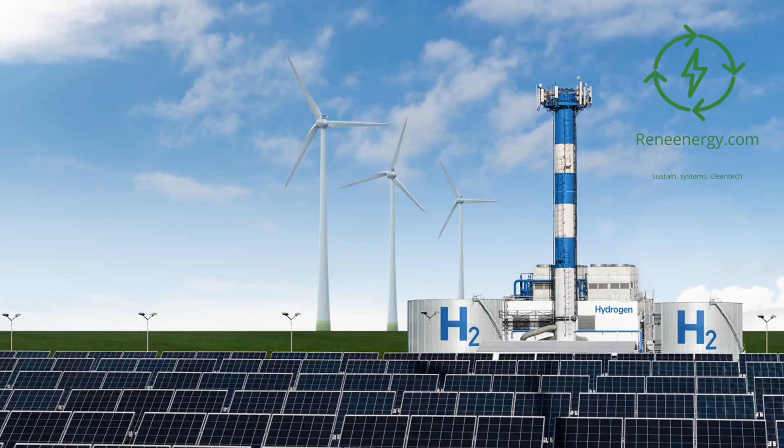One of the most promising and innovative solutions in this journey is green hydrogen. Heralded as the fuel of the future, green hydrogen is not just a clean energy source, it's a beacon of hope for a carbon-neutral future. In today's episode, we delve deep into the world of green hydrogen, specifically focusing on its feasibility across various critical industries. We'll explore how industries like cement, chemical, steel, and power can transition to green hydrogen, the challenges they face, and the potential impact of this shift. Join us as we unravel the complexities and uncover the possibilities of green hydrogen, paving the way for a sustainable and greener tomorrow.

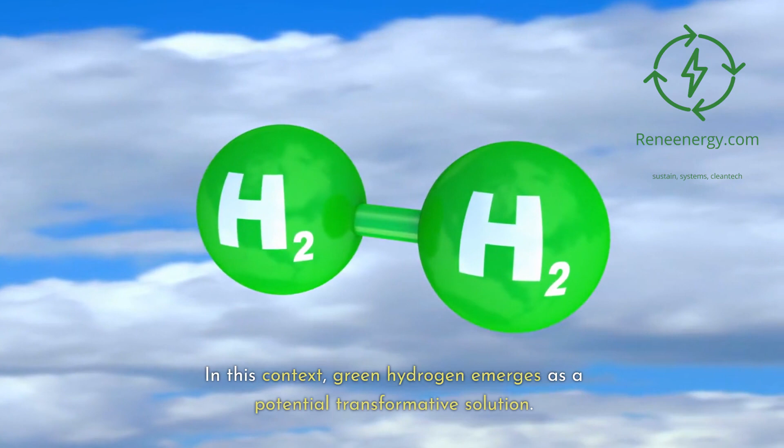Section 1. Green hydrogen in the cement industry. Overview of the cement industry's environmental impact and the potential role of green hydrogen. The cement industry, essential for infrastructure development, is a major contributor to global carbon emissions. This industry is responsible for over 4 billion tons of CO2 annually, making up 8% of global emissions. The process of producing cement, primarily through the firing of limestone and clay, is energy intensive and releases significant amounts of CO2. In this context, green hydrogen emerges as a potential transformative solution.

Technological advancements and green hydrogen integration. The integration of green hydrogen in cement production is a part of the broader energy transition in the sector. Technological advancements complement the role of green hydrogen. This integration is particularly promising as green hydrogen, being a sustainable way to store and move energy, aligns with the industry's push towards decarbonization.

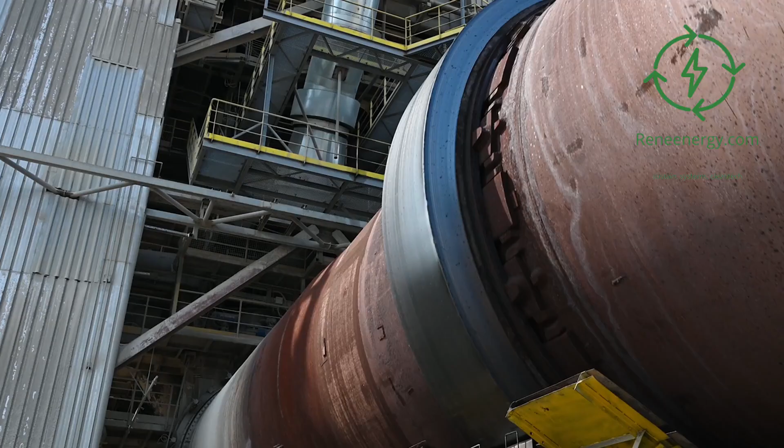Firing cement kilns with green hydrogen. The adoption of green hydrogen in cement kilns is advancing, with trials in Europe aiming for 100% fossil fuel substitution. Combining green hydrogen with natural gas is seen as an effective method to decarbonize electricity and heat production in the cement industry.

Managing hydrogen in cement plants. Handling hydrogen in cement plants requires precautions due to its flammability and buoyancy. The integration of hydrogen in cement kilns can impact the refractory materials and potentially increase NOx levels, necessitating careful management of hydrogen injection and oxygen concentration.

Co-locating electrolyzers and utilizing byproduct oxygen. An additional benefit of integrating electrolyzers in cement plants is the availability of byproduct oxygen. This oxygen can enhance the cement production process by providing a shorter and more stable flame, enabling higher quality clinker production.

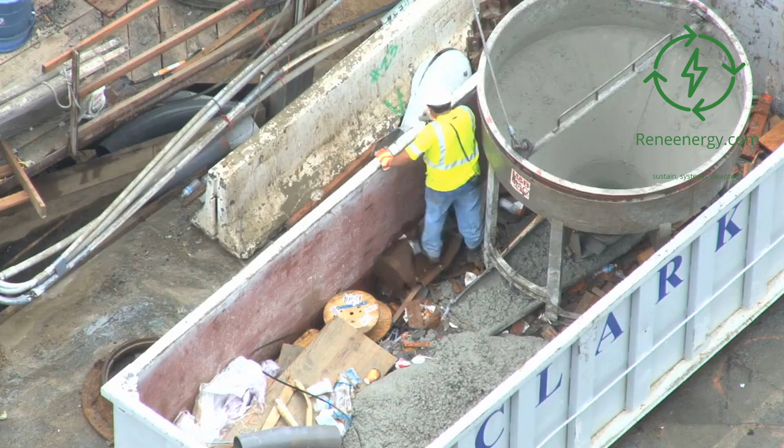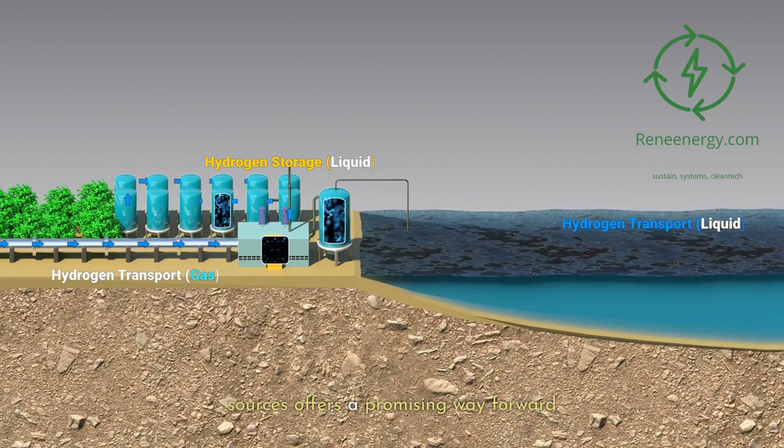The path to decarbonization. While the cement industry has made progress in reducing its environmental impact, the path to full decarbonization remains challenging. However, the use of mature technologies and green hydrogen generated from renewable sources offers a promising way forward. In summary, the adoption of green hydrogen in the cement industry presents a crucial opportunity to reduce its substantial carbon footprint. Despite the challenges of high costs and the need for new infrastructure and technologies, the potential benefits of reduced CO2 emissions, enhanced energy efficiency, and sustainable production processes make it a compelling path for the industry's future.

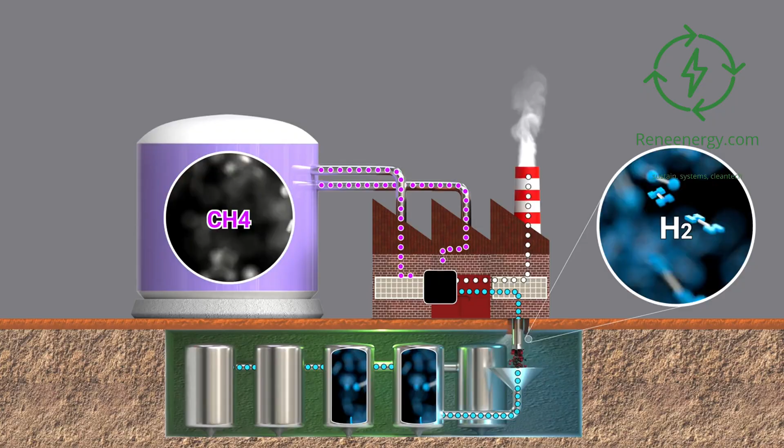Section 2. Green hydrogen in the chemical industry. Role of green hydrogen in the chemical industry's shift to sustainability. The chemical industry plays a crucial role in the global economy and is pivotal in the transition to a sustainable and circular economy. However, this sector faces significant challenges in achieving net zero emissions.

Green hydrogen emerges as a critical enabler and an opportunity for the industry, not only aiding in achieving net zero but also opening up new sustainable revenue streams. To fully realize the potential of green hydrogen, the chemical industry needs to go beyond energy efficiency and bio-based feedstock, exploring innovative solutions like green hydrogen, carbon capture, and electrification.

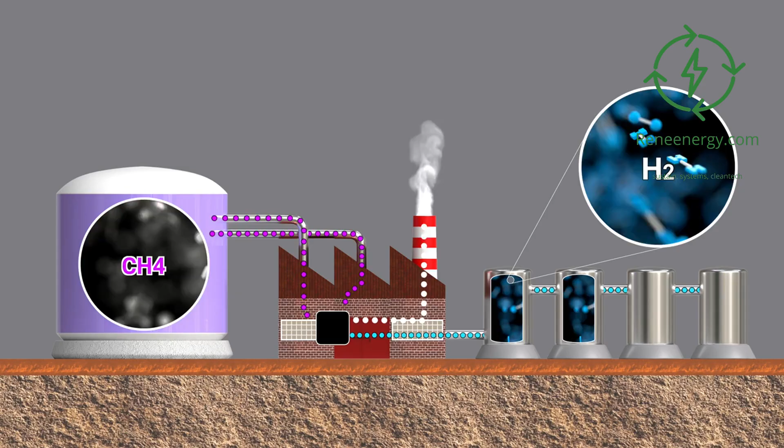Current use and future potential of green hydrogen in the chemical industry. Currently, the EU industry uses about 10 million tons of hydrogen, mainly for producing ammonia and in refining. Most of this hydrogen is gray, produced in a carbon-intensive manner. The shift towards low CO2 hydrogen, specifically blue and green varieties, is crucial for decarbonization.

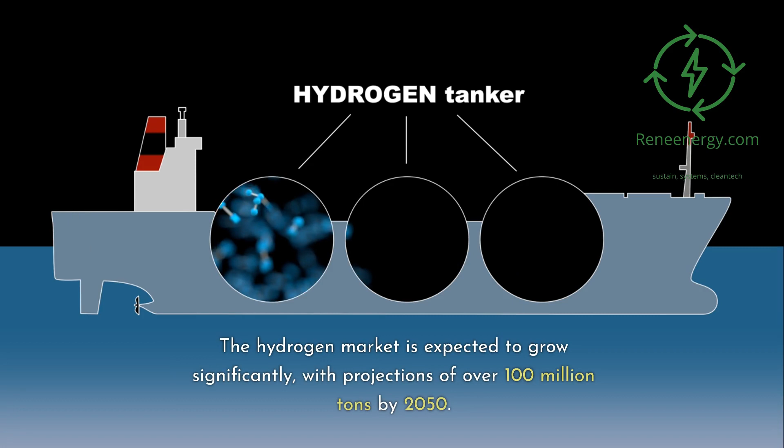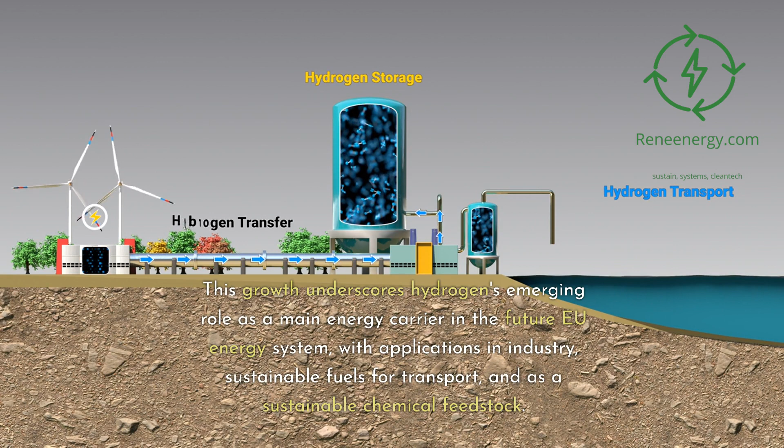The hydrogen market is expected to grow significantly, with projections of over 100 million tons by 2050. This growth underscores hydrogen's emerging role as a main energy carrier in the future EU energy system, with applications in industry, sustainable fuels for transport, and as a sustainable chemical feedstock.

Investment and global initiatives in hydrogen development. The emerging hydrogen economy is garnering support from policymakers at both European and international levels. An estimated investment of €430 billion is required by 2030, highlighting the industry's commitment to and interest in hydrogen. This investment is crucial for developing hydrogen projects and addressing the urgency to act now.

Countries outside Europe, like China, are also formulating hydrogen strategies, with the demand for hydrogen in China expected to reach 60 million tons annually by 2050.

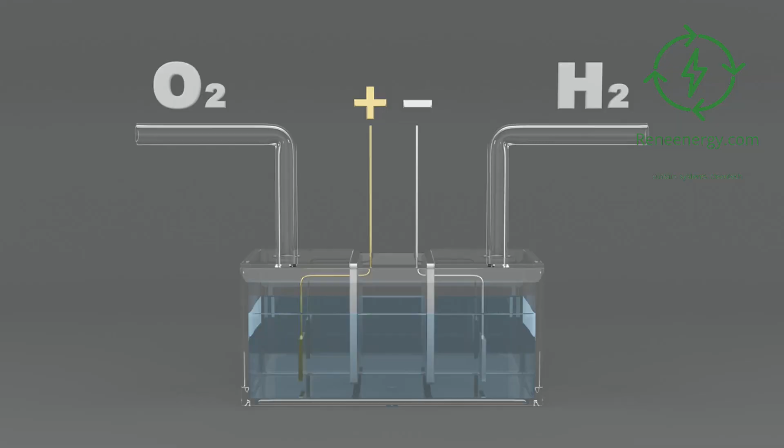Challenges in scaling up green hydrogen. The scaling up of green hydrogen faces several significant challenges. First, technology readiness and cost. Improvements in electrolysis and fuel cell efficiencies are necessary for cost-effective hydrogen production. The cost of green hydrogen production needs to be competitive with conventional fuels.

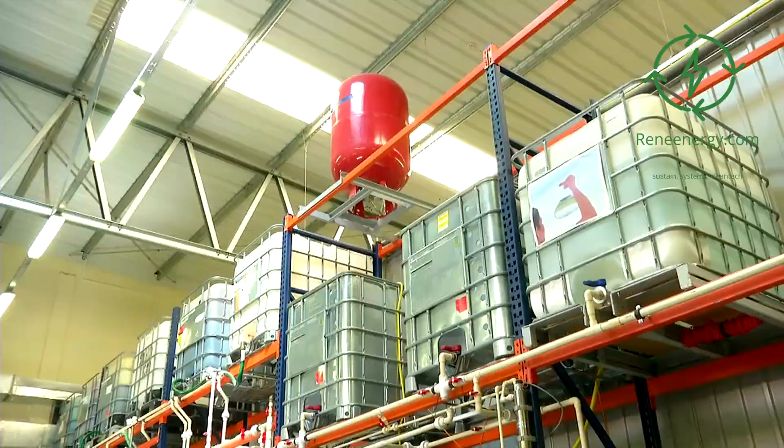Second, infrastructure development. Large-scale hydrogen production facilities and robust distribution networks are essential. Investments in production capacity and storage solutions are critical.

Third, market off-takers and customer acceptance. Creating demand and convincing market off-takers of hydrogen's benefits is vital for market development.

Fourth, financing and investment. Overcoming the capital-intensive nature of hydrogen scaling requires attracting investments and developing innovative financing models.

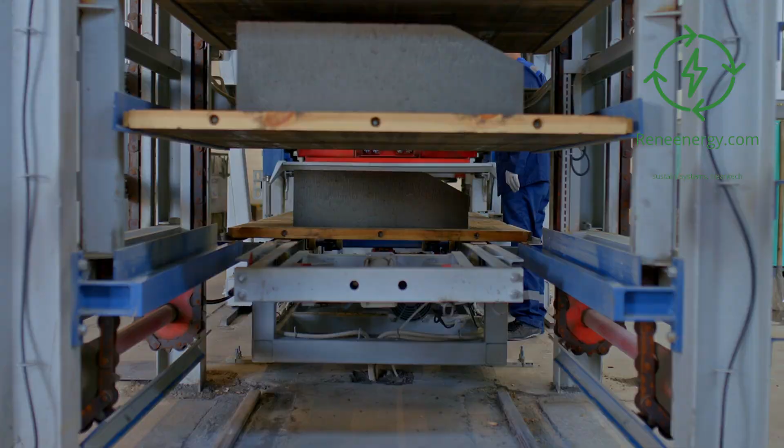Fifth, supply chain bottlenecks. Addressing the availability and sourcing of raw materials and ensuring an adequate supply of critical equipment is necessary. Sixth, policy frameworks. Supportive policies and regulations, financial incentives, and international collaboration are key to fostering green hydrogen adoption.

The chemical industry's transition to a more sustainable portfolio through green hydrogen is a complex but feasible endeavor. It requires strategic choices, technological advancements, substantial investments, and supportive policies. Addressing these challenges collaboratively can help the chemical industry make a profitable and sustainable shift to green hydrogen, ultimately contributing to global decarbonization efforts. Section 3: Green hydrogen in the steel industry.

The steel industry's carbon footprint and the role of green hydrogen. Steel, a cornerstone of modern construction and engineering, faces immense pressure to reduce its carbon footprint. As one of the largest CO2 emitters globally, the steel industry's transition to lower emissions is both an environmental necessity and an economic imperative. Every ton of steel produced results in approximately 1.85 tons of carbon dioxide, contributing to about 8% of global CO2 emissions.

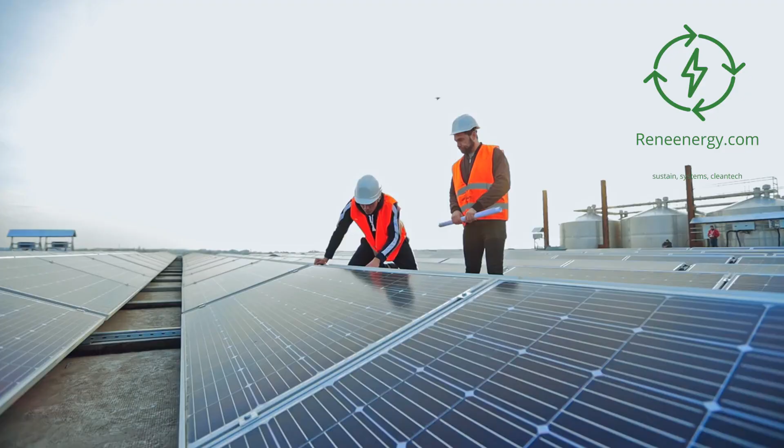In this context, hydrogen-based steel production, particularly using green hydrogen, emerges as a critical strategy for decarbonization. Implementing hydrogen-based steel production can be approached in both new, greenfield, and existing, brownfield, facilities. This involves retrofitting existing electric arc furnace (EAF) plants or rebuilding facilities to incorporate green hydrogen in the production process. Decarbonization strategies will vary depending on location, technical feasibility, infrastructure, market demands, and the regulatory environment.

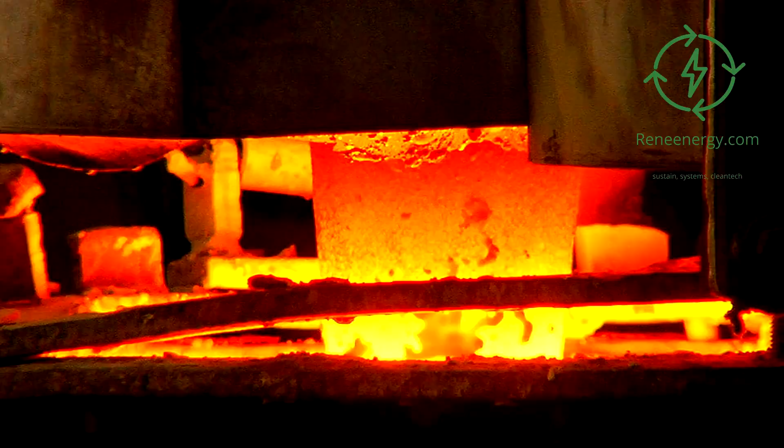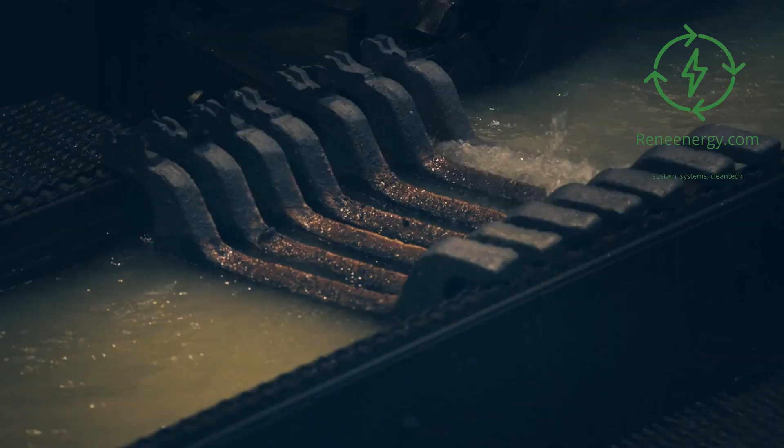Direct reduced iron (DRI) and electric arc furnace (EAF) using hydrogen. A key method in this transition is using green hydrogen-based direct reduced iron combined with EAFs. This process replaces fossil fuels with hydrogen produced from renewable energy, leading to nearly emission-free steel production. The hydrogen can be used as an alternative reductant to produce DRI, which is then processed into steel using an EAF. This DRI/EAF route, currently employed using natural gas, can be adapted to use green hydrogen, significantly reducing carbon emissions.

Challenges and cost dynamics. The transition to green hydrogen-based steel production involves several challenges. First, green hydrogen production. Producing green hydrogen requires significant electricity from renewable sources, posing a challenge in ensuring sufficient and steady supply. Second, cost of green hydrogen.

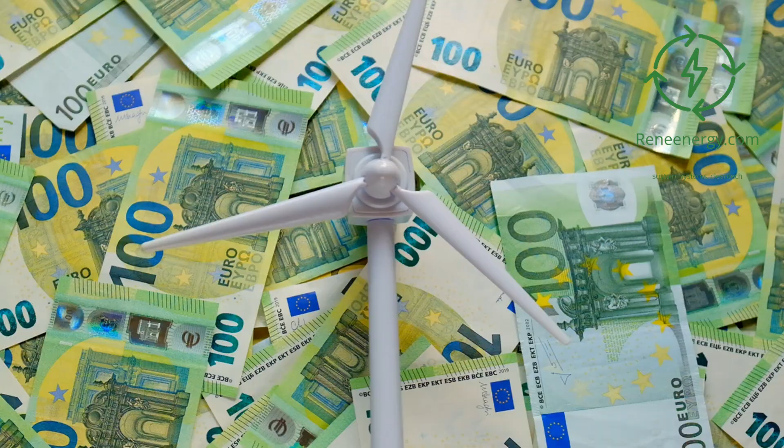While currently higher than gray hydrogen, the cost of green hydrogen is expected to decrease, driven by falling costs of renewable electricity and electrolyzers. Third, the EU Emissions Trading System (EU ETS). The EU's cap and trade strategy for CO2 emissions is influencing the economic dynamics, making green hydrogen-based steel production more viable as carbon dioxide prices increase.

By 2030, the cost dynamics are expected to shift, making green hydrogen-based steel production more economically competitive. This shift will be crucial for the industry, especially in Europe, where stringent emission regulations are in place.

Decarbonization tipping points. The timeline for the industry's transformation to green hydrogen-based steel production is influenced by various factors. First, power supply. The need for increased capacity and electricity derived from renewables is crucial for this technological shift. Second, hydrogen supply security.

Ensuring the availability of green hydrogen on an industrial scale is fundamental to the production of hydrogen-based steel. The steel industry's journey towards green hydrogen-based production is not just a response to environmental challenges but also an opportunity to reshape its future. While the path involves overcoming significant technical, economic, and regulatory challenges, it holds the promise of transforming one of the world's most carbon-intensive industries into a more sustainable and environmentally responsible sector.

Section 4: Green hydrogen in the power industry. Transformative potential of green hydrogen in power generation. Green hydrogen is increasingly recognized as a game changer in the power industry. It offers a cleaner burning alternative to conventional fuels and is pivotal in the transition to clean energy. The power industry can significantly benefit from the versatility of hydrogen, especially in terms of reducing carbon emissions and advancing towards a sustainable energy future.

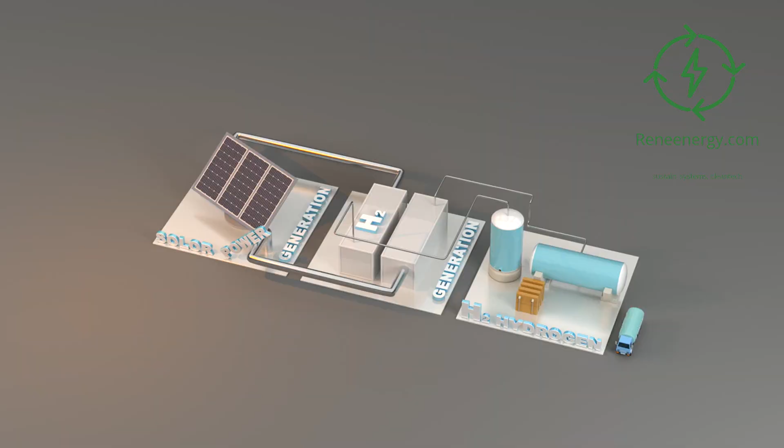Advancements and feasibility studies in green hydrogen production. Although the current cost of producing green hydrogen from renewable sources is high, the momentum along the value chain is driving cost reductions in its production, transmission, distribution, and end applications. Sectors like oil refining, ammonia, methanol, and steel production are already extensively using hydrogen. In power generation, hydrogen has the potential to play a critical role, particularly in sectors such as transportation, buildings, and power generation itself.

Current role and future integration of hydrogen in power generation. Currently, hydrogen accounts for less than 0.2% of electricity generation. However, the integration of hydrogen, particularly in the form of ammonia, can significantly decrease the carbon impact of conventional coal-fired power plants, hydrogen gas turbines, and combined cycle gas turbines (CCGT). Hydrogen is also crucial for long-term and large-scale energy storage, balancing seasonal variations in electricity supply and demand from renewable sources.

Global initiatives and market growth for green hydrogen. Several countries are considering a hydrogen-based economy to address carbon emissions, energy stability, and climate change. For instance, the EU's hydrogen strategy targets a renewable hydrogen electrolyzer capacity of 6 gigawatts by 2024 and 40 gigawatts by 2030. Similarly, India's National Hydrogen Mission aims for significant green hydrogen production by 2030, and Australia plans to establish hydrogen hubs to leverage existing or potential hydrogen markets. These initiatives underscore the growing market and the strategic importance of green hydrogen in the global energy transition.

Challenges in transitioning to hydrogen power plants. Transitioning to hydrogen power plants entails various technical and infrastructural challenges. These include developing combustion system technology capable of operating on mixtures of natural gas and hydrogen, addressing the impact on exhaust gas characteristics, and ensuring compliance with NOx emission regulations. Furthermore, the transition requires significant infrastructure investment, particularly for electricity, port, and water services. Customizing the distribution of hydrogen to suit customer requirements is another critical aspect, whether in gaseous or liquid form.

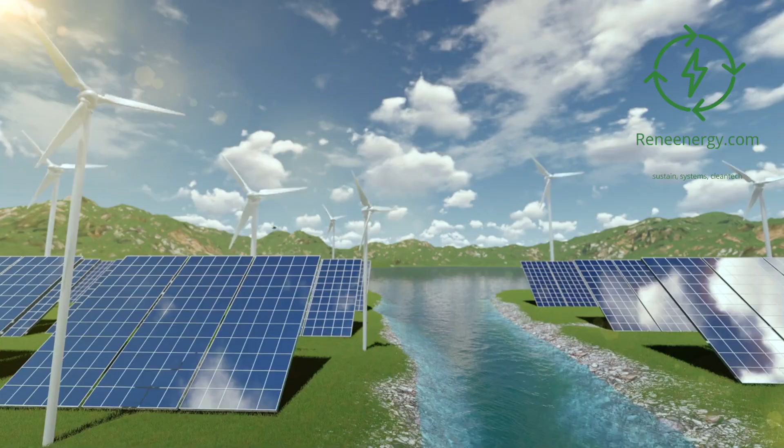The incorporation of green hydrogen in the power industry represents a significant step towards decarbonization and a sustainable energy future. While the challenges are notable, the ongoing technological advancements, feasibility studies, and global initiatives are paving the way for more extensive integration of hydrogen in power generation. This transition not only supports environmental goals but also positions hydrogen as a key component in the future energy landscape.

Key takeaways. 1. Cement industry: Green hydrogen can significantly reduce CO2 emissions. Challenges include high production costs and infrastructure needs. 2. Chemical industry: Green hydrogen offers new sustainable revenue streams. Key obstacles include technology readiness and market development. 3. Steel industry: Transitioning to green hydrogen-based production is crucial for reducing carbon emissions, with challenges in cost and technological adaptation. 4. Power industry: Green hydrogen has transformative potential for clean energy transitions, facing challenges in integration and infrastructure development.

Importance of green hydrogen. Green hydrogen stands as a pivotal sustainable energy source, crucial for decarbonizing various sectors and paving the way towards a greener future.